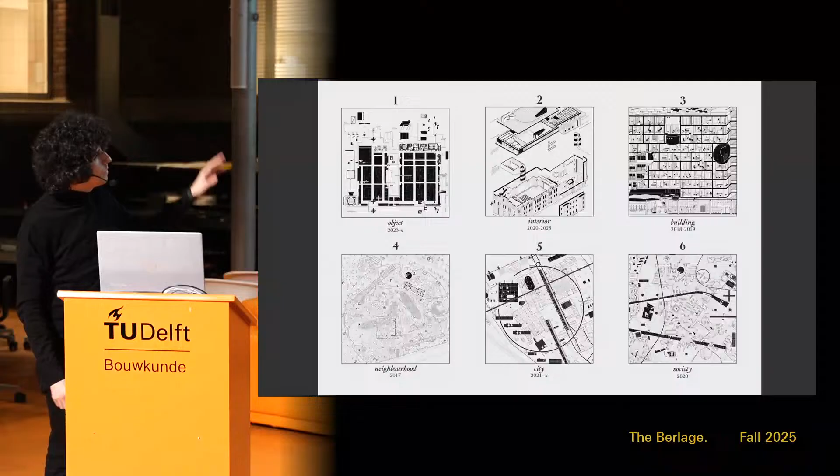As you can see, each of them has a different scale, from the scale of the object, going up into the scale of the interior, and scaling up to the scale of the building, the neighborhood, the city, and society. But before going into that, I would like to introduce very quickly three concepts that have informed my professional practice since the very beginning, sort of, in 2017.

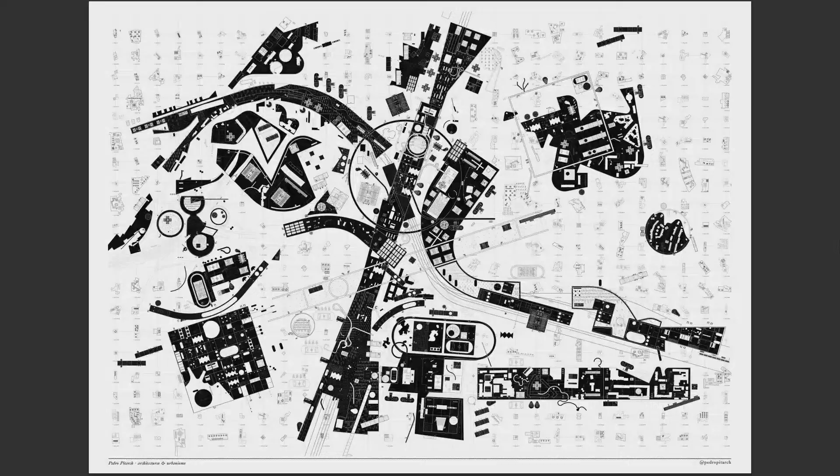But also this approach could allow us to incorporate into architecture many other layers of information that are not architectural per se, but that can be represented and graphed with this type of language, allowing us to incorporate economical information, cultural information, or even ecological information into the language.

The second concept is an approach to our projects in which we understand them as mediums and devices, dealing with an idea of the dissolution of programs. So in the projects I'm sharing with you today, we detach from this modern heritage in which form and program have a relation in the sense of typology, and we try to criticize that through examples where the assigned form to a program is not so relevant.

What is relevant for us are the architectural conditions and qualities that can be performed within it. Finally, the third concept constantly informing the practice, embedded into the DNA of what we do, is a condition of the erasure of differentiation, or the idea of the oxymoron, by which we address most projects critically engaging with apparent opposite terms, such as life and work, or machine and organism.

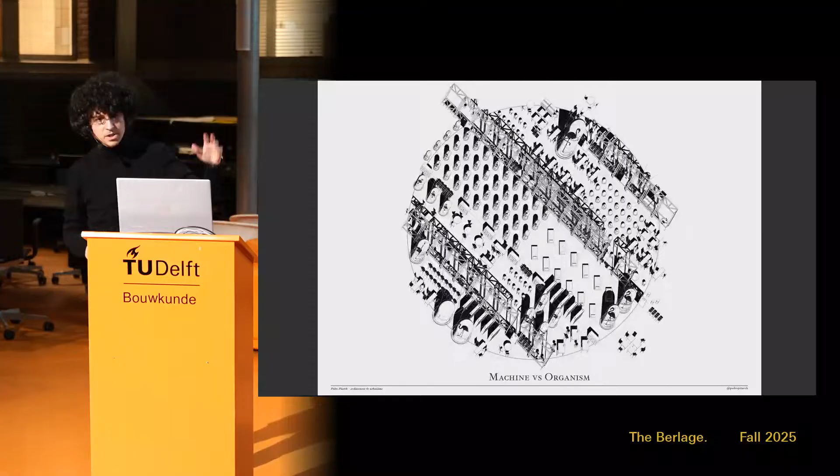We try to emphasize the idea that in contemporary society, these concepts, which by heritage of the modern project have been presented to us as complete opposites, are not so opposite — they are interwoven with each other. These three concepts have led us to a constant approach in the practice of a critique of typology.

Moving ahead into the projects, these 6 projects that I'm going to be presenting operate in 4 different scales. The first operates in the scale of the object, the following 2 in the scale of the building, the following 2 in the scale of the city, and the final one in the scale of a society. With this, we are trying to demonstrate 4 critiques to the concept of typology, or typological architecture, from the material, from the program, from the form, and from time, so that each of these scales, growing up in scale, is going to try to state a certain type of critique to the typology.

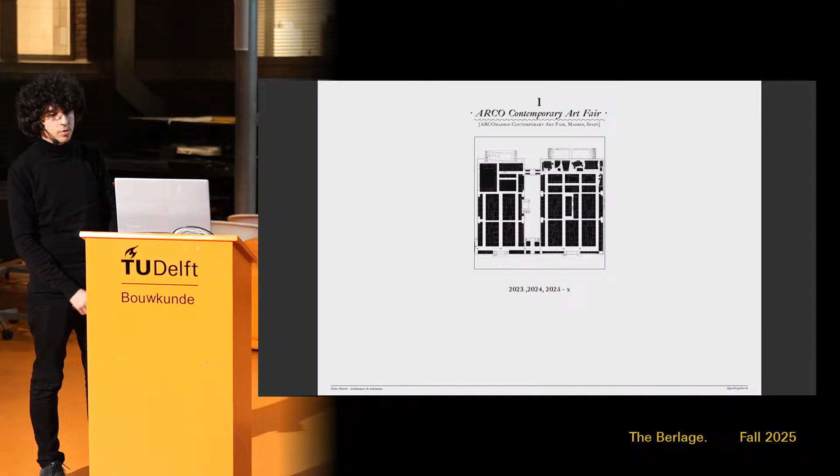So the first project I'm going to be presenting is a project that is somehow ongoing. We were commissioned, after winning a competition 3 years ago, to design Arco, the contemporary art fair of Madrid. It's something we are going to be continuing for a couple more editions.

Since the very beginning, we started by analyzing the conventional approach to the art fair, which belongs to this kind of layout. It's quite a shopping mall-oriented layout with a scheme that operates in corridors with big blocks.

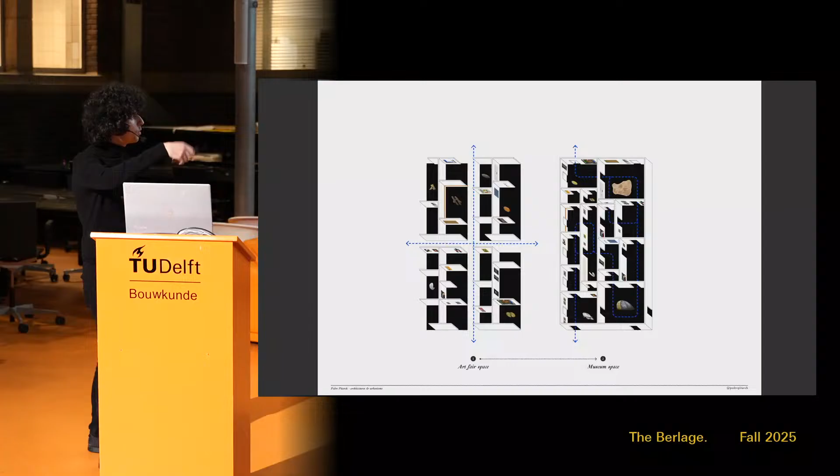We tried to propose from the very beginning of the project 2 migrations. The first migration was this idea of trying to shift from the fair space to the museum space, which deals not just with the pathways but with the notion of how you approach and relate to art. The second migration we proposed is a migration from the generic interior of the fair to an encapsulated urbanism of a city of galleries.

Understanding that these types of projects, regardless of happening in an interior, are so huge and have such a bigness of scale that they can perform as interior urbanisms.

For that idea, we started to work with the galleries themselves, with the physical galleries, with the plans of the galleries that show their art and that go and travel to Madrid to be present in this art fair.

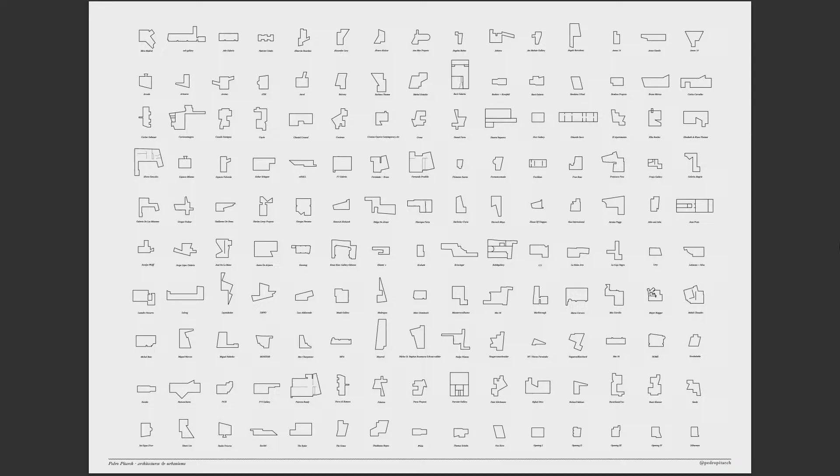We started to design a series of strategies by which those plans could be simplified and constructed with the generic materials of the fair. We later progressed this into applying the technique to all the plans of the galleries, so that we could argue that the plan of this city of galleries of Arco, this encapsulated urbanism, could become a gathering or interior city in which each gallery was exhibiting in an exact one-to-one mock-up or replica of their own architecture, with a common, totally generic materialization: the white wall board of the fair.

We have been applying this technique and approach to the fair, understanding that this approach to the layout could offer us the possibility to understand that these interiors are domesticated urbanisms, by which they are somehow in between the qualities of an exterior space and an interior space, and also of a public space and a private space.

But what is more important for us in this project is not so much the scale of the encapsulated urbanism, but much more the idea of object-oriented urbanism that we have been working with in the project.

So we have been deliberately working with fair materials that are somehow quite ugly, such as this kind of fair carpet, which is the cheapest, super ugly material in art fairs, trying to emphasize and visualize that material with non-conventional uses, for example applying it to the walls, and also the lighting trusses, using them in another way so they can become part of the language of the fair itself.

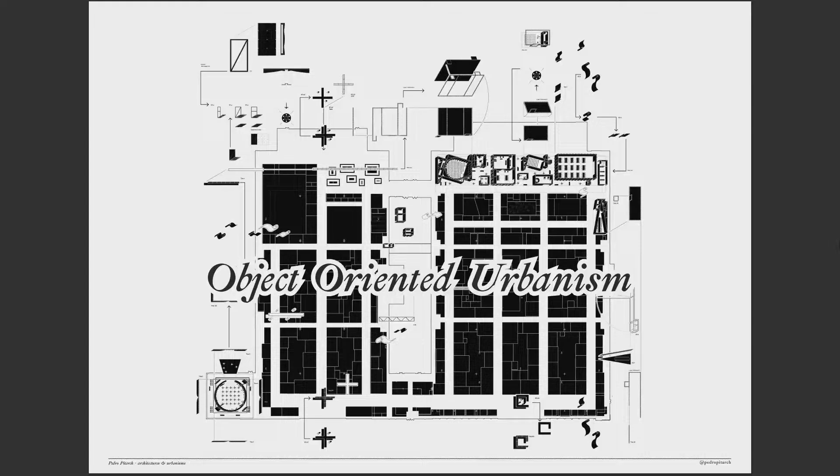And so the whole project has been pivoting around this idea of object-oriented urbanism that tries to visualize all the different construction techniques and materials of this fair's synthetic organism, trying to position ourselves just a little bit apart from architectural design, and trying to address that our position there is much more of an infrastructural curation.

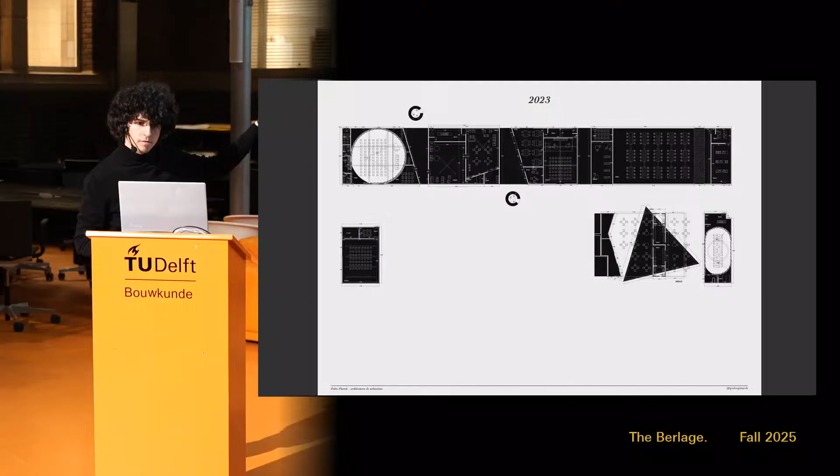I'm going to share with you the plan of one fragment of the fair, specifically the public programs, and how it has evolved from 3 years ago to 1 or 2 years ago and the last edition. For us, it's not so important the formal differentiation of these plans, but actually how the materials, construction techniques, systems, and working methods with the builders have been informing the form.

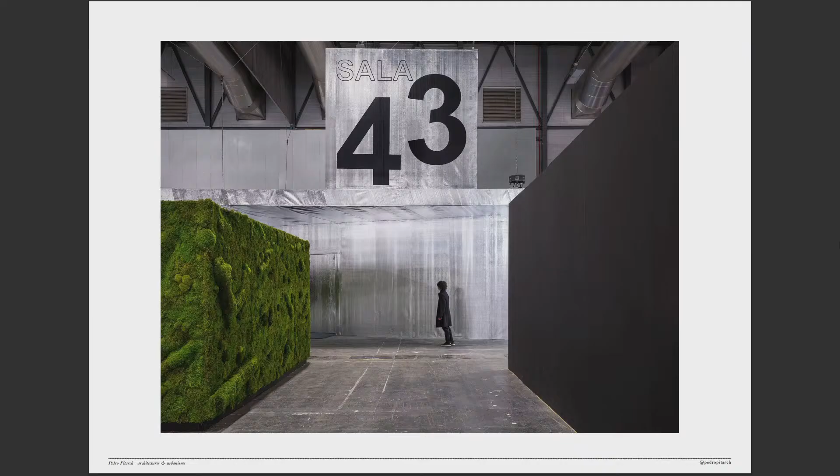The form has not been driven so much by the program, but much more by the materialization using aluminum insulation materials for facilities, or carpet for acoustic insulation in some pavilions, or geotextiles for creating the background of the fair. Together these materials start to construct this fair ecosystem, an artificial ecology that isn't understood conventionally, but where the fair itself is an ecosystem in which these materials and construction techniques inform the project.

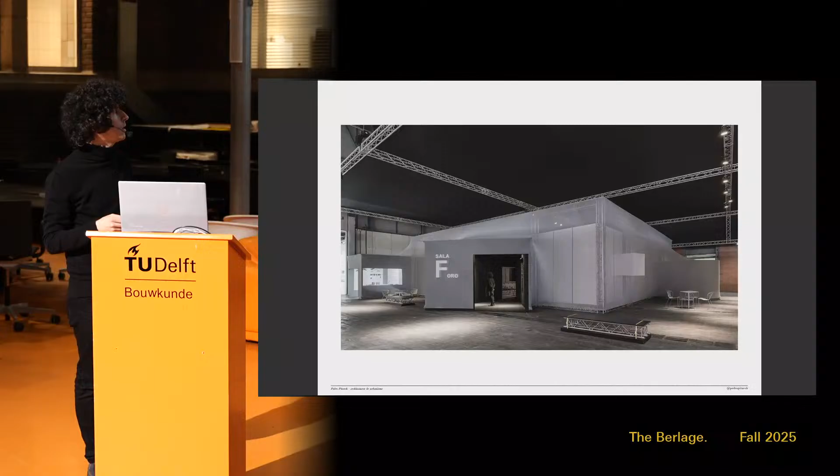But the same project was developed in the following edition with a completely different form, which resulted from the type of material we were applying. We were wrapping the whole piece, so the composition of the plan wasn't important, but rather the material that wrapped it — a net usually used to break reverb sound in stadiums, which we used to generate an acoustic insulation skin for the activity happening inside.

As I was saying, it's not just materials but techniques of assembly that have been defining the shapes and materialization of the projects. In this case, we were not just applying them for the qualification of the spaces, but also in terms of longer logics of the fair.

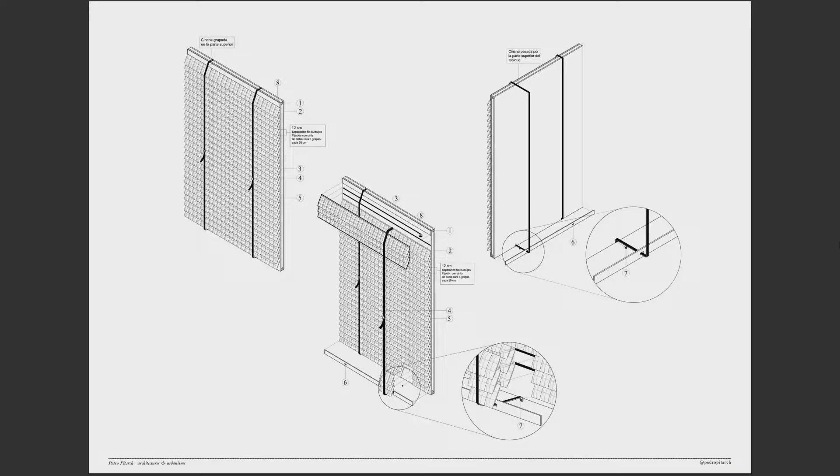On the right we can see we were applying this material — I don't know how you call it — like the bubbles you blow when you order something from Amazon, sometimes packed inside. We used these materials to wrap around a whole piece, and at the end of the fair, galleries would remove them to wrap the art pieces that were sold for shipping. So we were thinking of a bigger, wider logic of this fair ecosystem, where material is not wasted but injected into another process.

The same applies to the trusses — these rented trusses we used to invent a type of furniture applied in many ways throughout the fair, also designing with it the space of the food court for the fair.

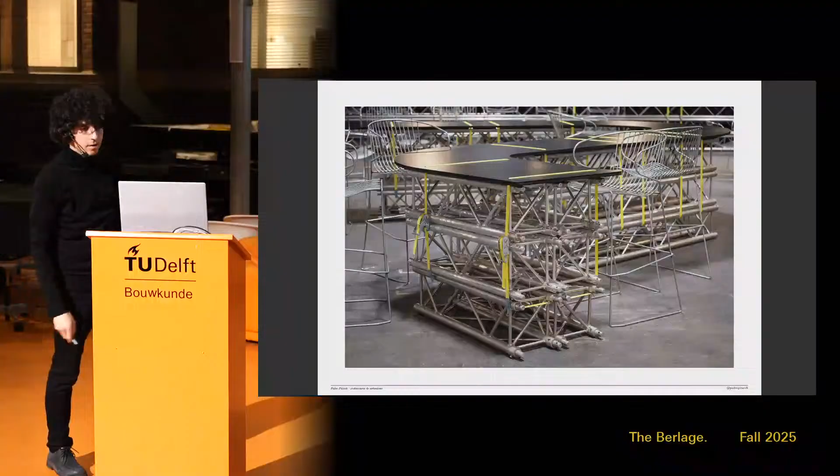Stepping up in scale, the following project is one we've been developing for the past 5 years, in a very intermittent way due to political concerns. It was part of a competition we won in 2020 for the restoration of a cinema in the south of Spain, part of a complex of two buildings. The one on the left is from the late 19th century, originally a market later transformed into a cinema. The building on the right was designed by the same architect with a modern movement approach, and it was a dwelling.

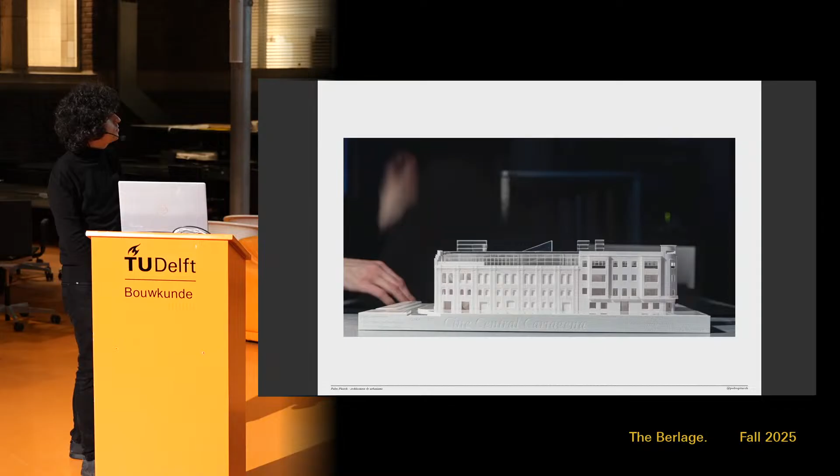So basically, they had two types of heritage preservation requirements. The cinema we needed to keep as it was inside and also on the outside, but the dwelling building could be demolished inside, but we needed to preserve the facade.

So the project, in a wider scale, offers us the possibility to address a wider necessity of the city of having a big civic space. So we operate with the pre-existence, emptying the interior of the dwelling building, but restoring the other.

And the whole project was developed around a piece that we were positioning from above, a big truss, from which a cube was hanging and inhabiting the interior of the space of the former dwelling building.

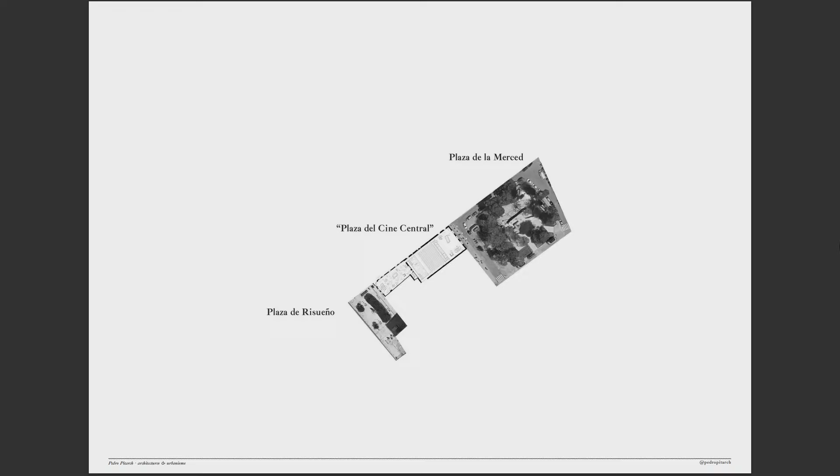As I was mentioning before, in an urban approach, the building offered this possibility of connecting two squares that are very important for the city but somehow not so big. By trying to make the ground floor of the project completely public, in a kind of a Nolli approach, we understood that these elements could become three courtyards, three plazas, or three squares.

So this was somehow the idea. If we were doing a section of the building, we were preserving the whole space of the main theater or cinema theater, and then just by adding this kind of roof structure, we were also adding more square meters. So instead of the competitors of the competition, who were putting everything in the second building...

We could generate this lower plan that was much more public and empty in a sense, and giving much more program by the thickness and the height of the upper structure of the roof.

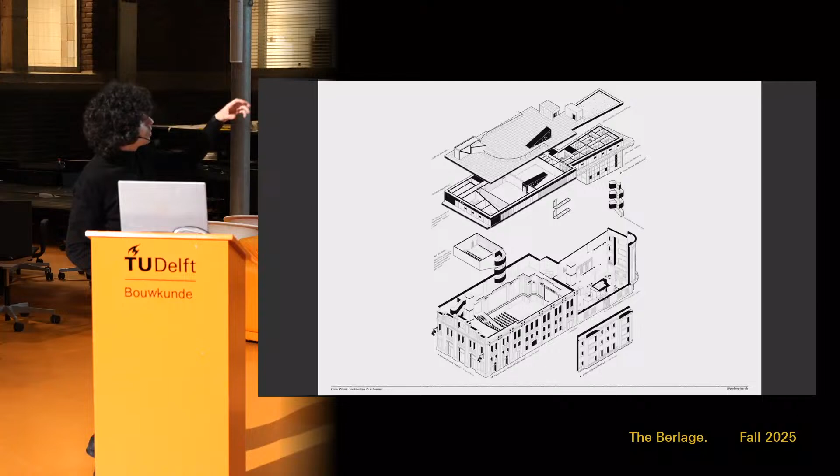So somehow the scheme is this one. The scheme is organized around a kind of skin, a historical skin, and then just positioning on top of it a space that was adding spaces for musicians and spaces for this kind of cultural center that is hanging from above. So in that sense, the programmatic approach to it is very simple.

It has one main room and then certain public spaces and service spaces. But for us, the organization of the project was not so much driven by the program, but driven by the structure itself. The city where it is positioned, Cartagena, is a city that has a lot of Roman...

ruins, and we had to do a series of tests, and we found out that the foundations for the new element that we were adding on top - because the facade didn't have enough capacity to hold the truss...

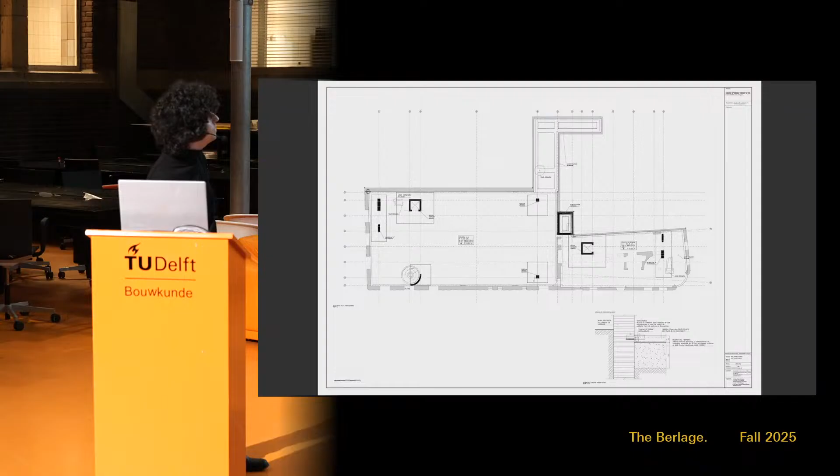The only foundations that we could do were these ones. So the structural support of the whole building needed to be positioned very weirdly, with a strange approach, by which we started to coordinate circulation elements, vertical circulation cores, on 8 points, and those 8 points are the points that somehow also define the structure of the truss above.

And that decision of defining the layout of the plan from the possibility of foundation and the relation with the truss is the one that drives the whole composition of the plan.

As I was saying before, the low level is a level which is extremely public and that allows, whenever there is no performing event, to open everything to the public. And then the upper levels, on one side, are very different.

On one side, we have the hugeness and vast space of the main hall, but on the other side, we have this little cube that coordinates different types of multipurpose rooms, with an in-between space from the outside and the inside, between this kind of second facade that we are doing inside.

And then finally, the last level is this level inside the truss, inside the structure, which gives us extra square meters - basically a lot of spaces for playing music and also for offices and so on. Also, this idea of the horizontal element on top was offering us the possibility to do events on the roof.

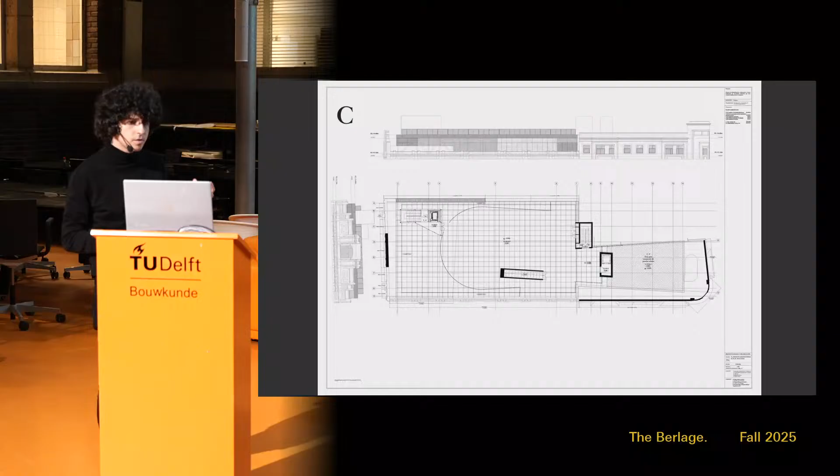So these vertical cores that I was explaining before, they reach the rooftop and also offer the possibility of appropriation of the rooftop.

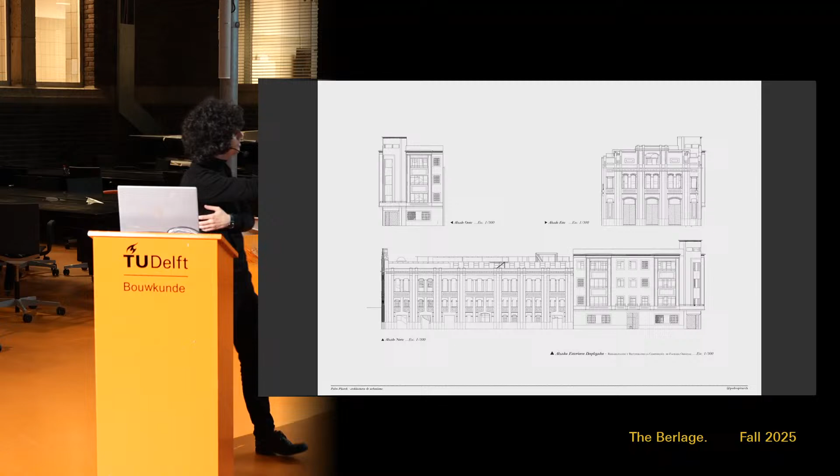And also for exhibitions. Then the final element that was extremely important in the project was this idea of preservation of the main facade. We tried to go farther there, and we didn't want to preserve just the exterior elevation of it, but we also wanted to define a series of strategies for preservation of the inner elevation of the facade, so that we could somehow materialize the whole story of the dwellings there.

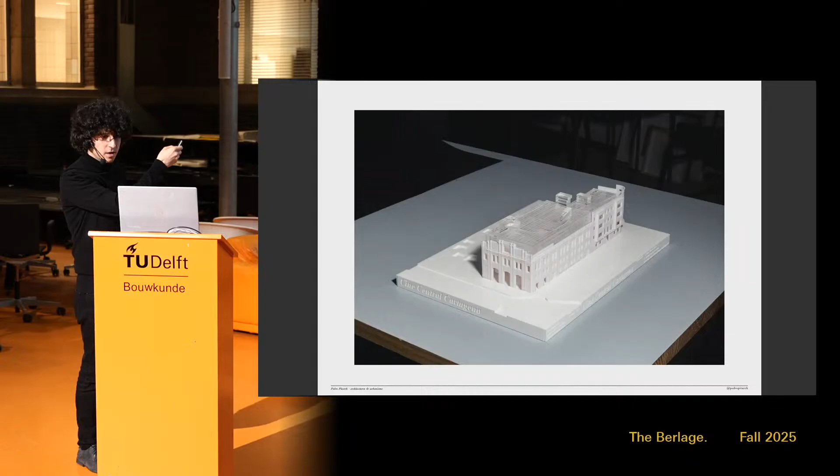So by detaching the new piece from the main facade, we were making visible all this interior, all these domestic interiors that we are keeping in the final project. This strategy of adding this element, from a construction point of view, also gave two problems to solve: one was the relation with the main facade of the cinema, and the other was the relation with the secondary building, which are completely different.

With the main building, the facade still has some kind of structural capacity, so the relation is like this. We are separating ourselves, but somehow we have to climatize underneath, and the relation between the truss and the facade is that they collaborate with each other.

But in the building of the dwellings it's a much more complex situation, because the main facade cannot support any capacity. So what we are doing here is a quite complex system in which we are rigidizing the facade because it's standing by itself, and then adding some elements that transmit horizontal efforts, but then the whole piece can move together up and down because they are articulated. So this whole element is coordinating the different structural efforts and the different foundation capacities: of the wall, which is not going to move so much, of the facade, and of the inner piece, which is expected to move down in the future and therefore needs to be articulated.

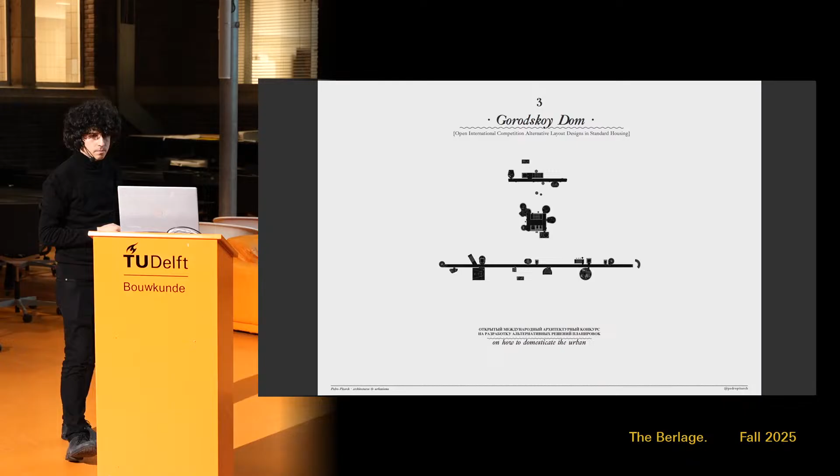Going a little bit more in scale, the third project I'm sharing relates to dwelling and housing. It's the result, again, of a competition where we got second prize many years ago for the government of Russia, who were seeking standard layouts for social housing and collective housing.

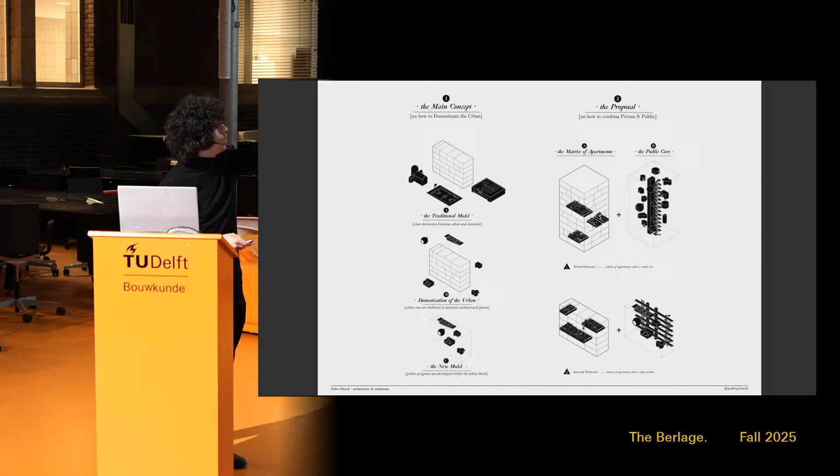So here we started the project with a very strategic approach. We analyzed that in the traditional concept of the conventional city, dwelling and public programs are completely detached from each other, so that public programs are usually placed either in urban spaces or in civic buildings. So we tried to explode that and inject those domesticated pieces of public use into the block of the residential building, generating two models in which the whole space was a layout resulting from adding a whole mass of apartments to a series of public capsules coordinated by vertical cores.

We applied this into three layouts, or three types. The first is the gallery, which is obviously a very continuous space in which the corridor was coordinating the relation between this vertical and horizontal public space of the corridor, together with the vertical cores and the access to these public capsules which held urban spaces, and all this horizontal element was also coordinated by the vertical cores in order to touch the ground floor, allowing the permeability of citizens to these other types of pieces.

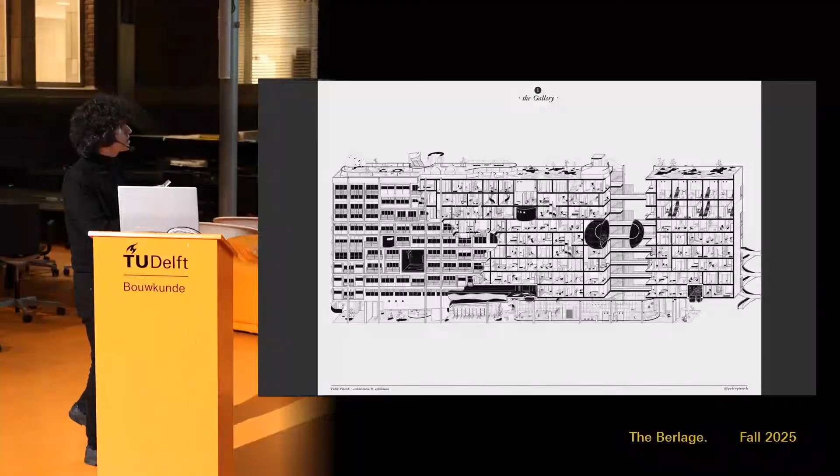So the result was this: a complex building that, behind a very deliberately generic type of facade, was offering a series of combinations, an interior city of different types of apartments for different types of users, where every now and then we were removing either an apartment or part of an apartment in order to inject one of these public capsules accessible from the corridor behind. And the result was something like that.

No, this is something that we were trying to generate—that back elevation of the project as something extremely public and extremely permeable. And somehow the same technique and the same strategy was applied to the other two types.

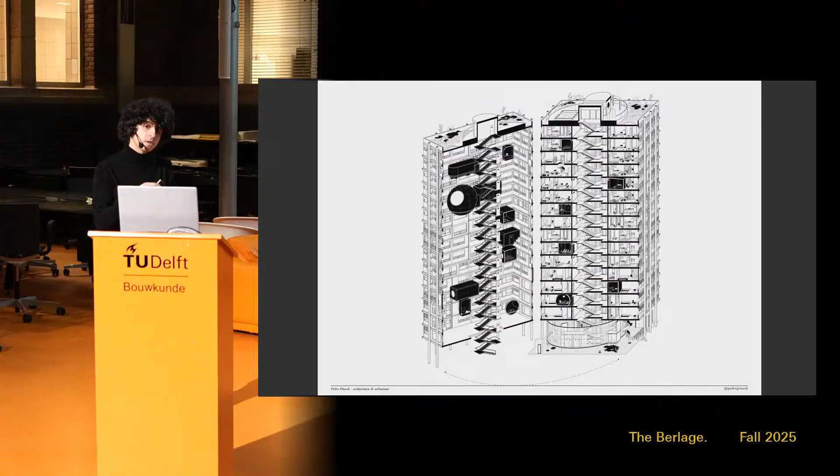One of the tower types, in which the whole sequence of public spaces were organized around the main central core. This allowed us to propose a scheme in which, behind a very generic type of facade, we were organizing a huge diversity of apartments, all accessible by a central core.

A central spine, a vertical spine that was also giving access to the public spaces. Finally, the third type was a mix between both of them—the block section, in which we had features from both the gallery, the lineal element coordinating the vertical cores, but also this central condition of the tower, materialized in a different form and a different layout.

The strategy behind it was also revealing this generic facade with a series of internal capsules, offering the possibilities of combination of different types of apartments. So the apartments were actually a whole big range of apartments.

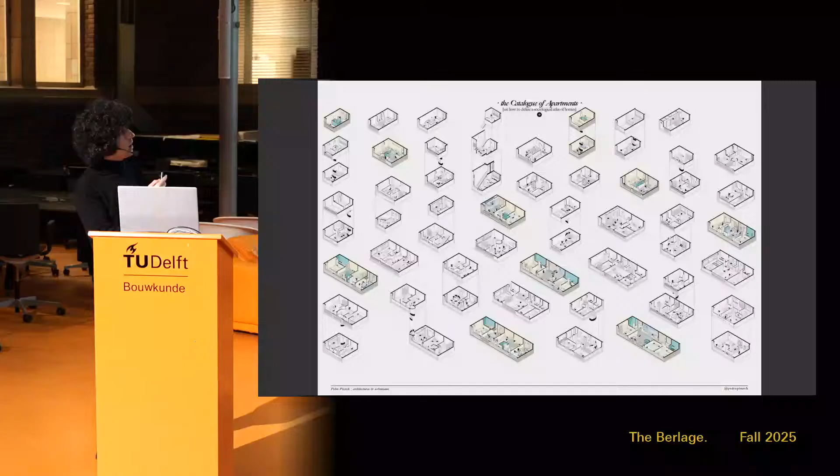We were requested to design the colored ones, but we offered different variations in relation to a series of sociological approaches that we did, so that we didn't approach the apartment so much from the specific square meter requirements per program, but designed different variations according to different social types and different combinations of families, or different critiques of the family core.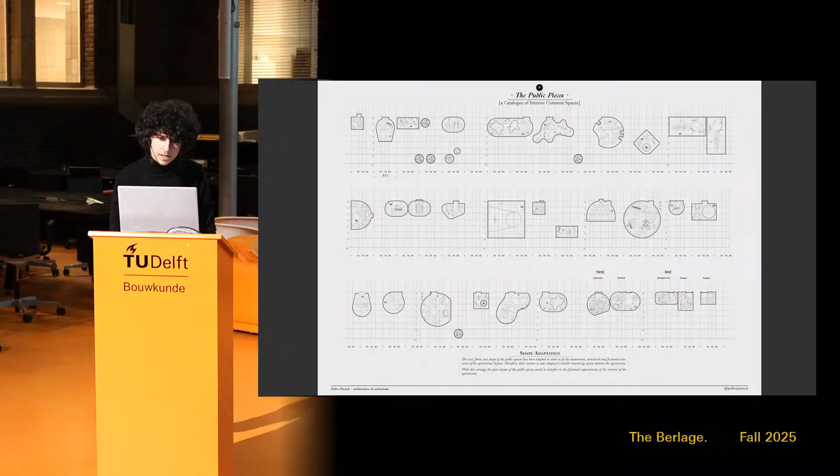Again, we had to do a catalog of the public spaces, which was extremely important to do in a very pragmatic and precise way, because regardless of their strange-looking shapes, they needed to be designed according to a series of patterns and modules, so that they could be either injected into the structure of the layout, or injected into the removal strategies of certain pieces from the apartments.

And the result behind this apparent complexity was this system, in which, through the materialization and the approach—this was the first project in which we started to do rendering—we wanted to emphasize a very neutral materialization behind a complex system, so that the complexity of the system and the strategy didn't require a complexity in materials.

Moving up on a scale, this following project is for the New Cyprus Museum. It was the result of an international competition in which, again, we got second prize, not first prize. This competition was extremely important because it's the first one that established the practice as something more serious, or business oriented.

Until then, I was doing competitions, I was doing projects, but this is the first serious project with a whole team. The project started with a brief from the jury, which was the definition of an archaeological museum for all of Cyprus in the city of Nicosia.

So answering that question, we ended up with this project, which is apparently very complex in form, but it's not so much addressed from form itself, rather from a strategy that tries to establish a critique of the typology of the museum as a neutral space for generic configurations for specific art pieces. This layout responds to a radical statement in which we divided the project into 3 layers.

First of all, we had a layer which was the public floor, an extremely open public space, which we stated from the very beginning was going to be all museum space, going to be on the ground floor, and going to be accessible.

Then a second layer, which were the closed pieces—both public and private specific pieces, with different ranges of formal approaches, but which somehow gather very specific programs that needed to be hermetic and secluded.

And finally, all of it was covered by an infrastructural roof that had a very generic form, almost a circle, which was an abstract gesture in order to gather the complexity below it.

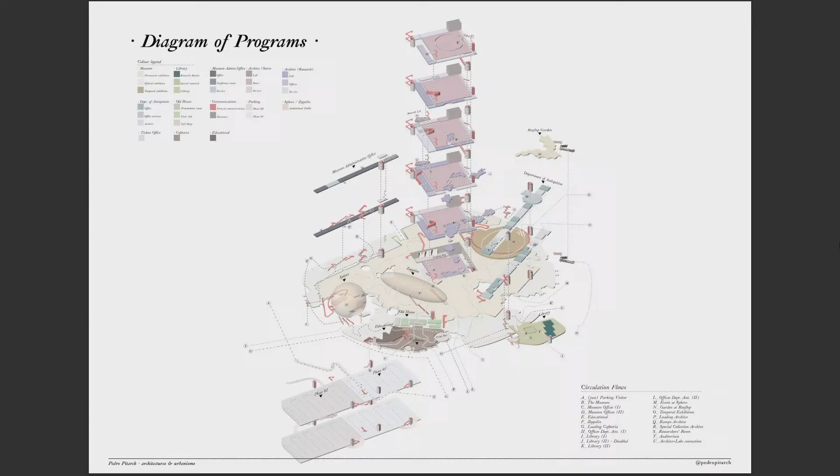The project was an extremely big project with a lot of complexity in programmatic approach and circulations that we needed to solve. But the approach was maybe not so much from the whole picture itself, but from the program, from a further picture, from a much more metropolitan approach.

So in this sense, we didn't start working with the space of the museum nor the spaces of the pieces, but we started working with the landscape and the connections to the city, and the urban approach of this museum, and how it could become a space for the city.

And in that sense, we started doing a series of this kind of atlas of urban infrastructures, a landscape of islands, which were urban elements included in the landscape around, and that could offer functions, or not so much function, but spaces and scenarios, scenographies for certain activities.

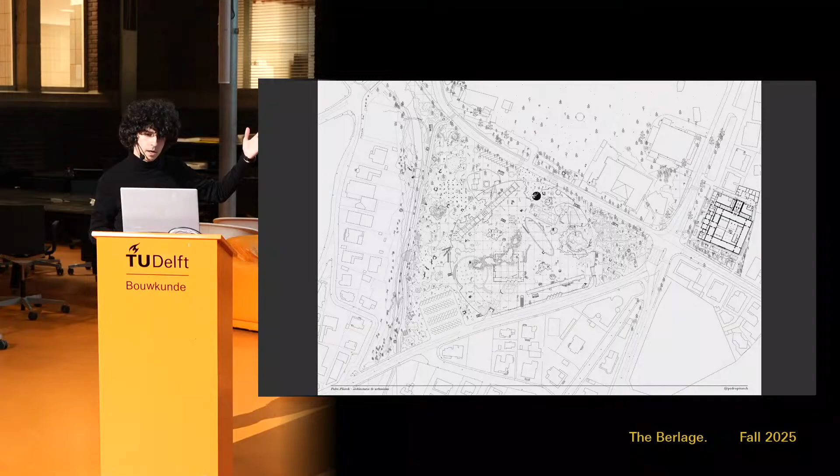This design was driven by the urban approach, so that the interior of the building and the museum was not decided as a different type of strategy. The site plan and the architectural plan, the architectural plan is just a zoom-in with more resolution of the site plan, giving more resolution at a smaller scale for the architectural requirements of the interior, but the DNA and genetics of that interior museographic space is a consequence of the exterior landscape.

So if we remove the facade of the building, we don't see a clear distinction between the exterior space and the urban space and the interior space of the museum, and that facade is a consequence of two very basic requirements. One is an environmental requirement, that the pieces needed insulation from the environment and climatic control conditions. And the second is economy, because they needed to charge a ticket for the visitor.

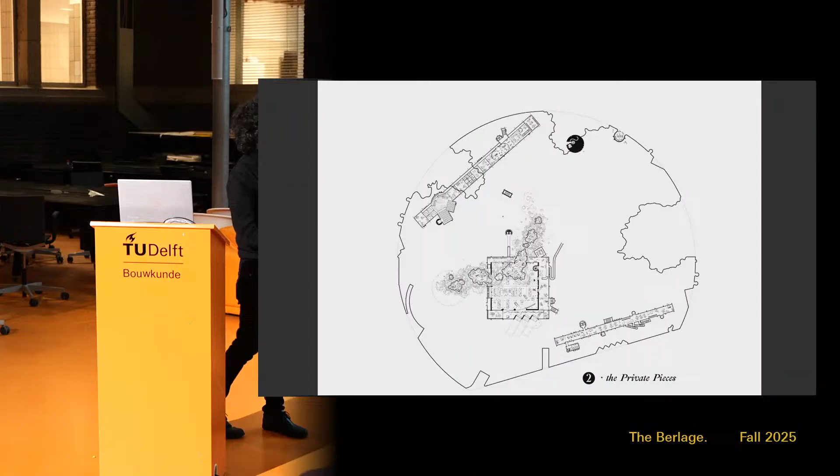Going into this, as I mentioned before, the whole space of the museographic space was the result of a series of strategies by which we were designing, first, a series of public pieces that each have a very specific form because they belong to the requirements of that function, and a series of private pieces.

After putting both of them inside the area of the project, the museum space was not so much designed, but was a consequence of the collision between the externality of the exterior urban space and all these buildings within buildings that we were positioning there. So the whole space, as sometimes in our cities when we are adding architectures, the urban space is like a poche in between, something that is not so much designed and decided, but is a shape that is found.

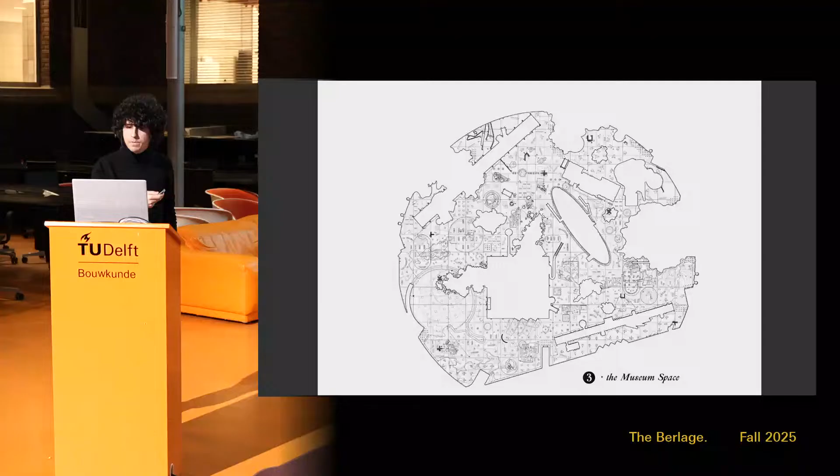So in this sense, we tried to take that, and we were probably, like most of the teams in the competition, who were obviously starting to design the museum and then the secondary spaces -- we did completely the opposite. We designed the secondary spaces and then the museum spaces, and therefore we didn't win the competition.

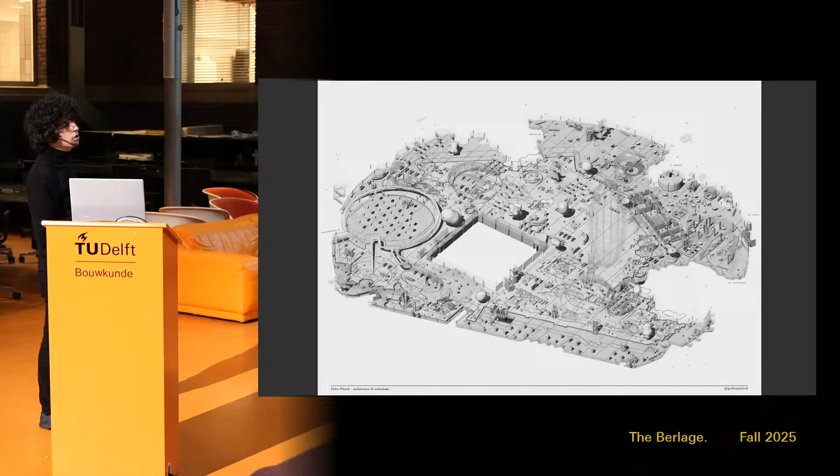But we could understand that this whole archaeological museum was a part of the city, and that the compartmentation was not coordinating the different areas, but the different areas were coordinated by devices, such as furniture, but also by landscape accidents. And that offered one of the possibilities, which was going from one section to the other in a kind of chronological approach.

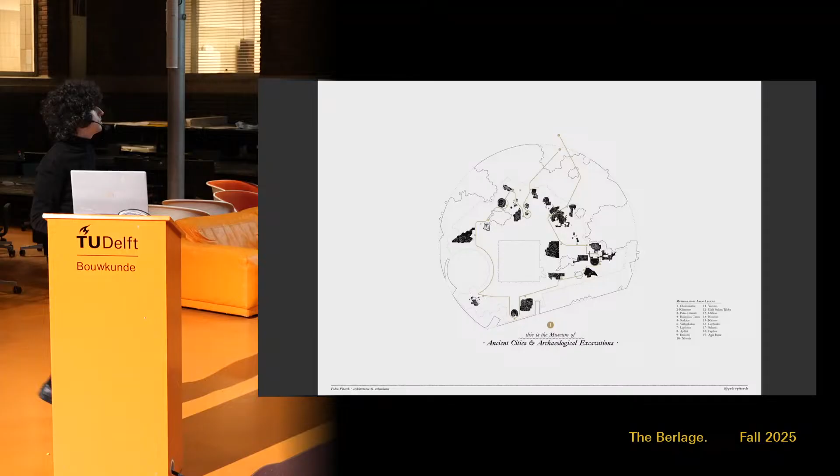Going from the early Bronze Age, Middle Bronze Age, and so on, but also offering us a strategy to define a series of museums within the museum. We provided in the competition about 8 configurations, but here I'm showing a couple of them, so that we could somehow go through the museum as if it was a city, as if when we visit a city for the first time—you go to the main square, then to the Oude Kerk, then to TU Delft and so on—but you don't travel around the whole city, you go to certain points. So we could...

design a museum which was the Museum for the Ancient Cities and Archaeological Excavations, but with the same layout also offer a museum of social governance and politics, or a museum of archaeological highlights for the very lazy tourists that only want to see the highlights.

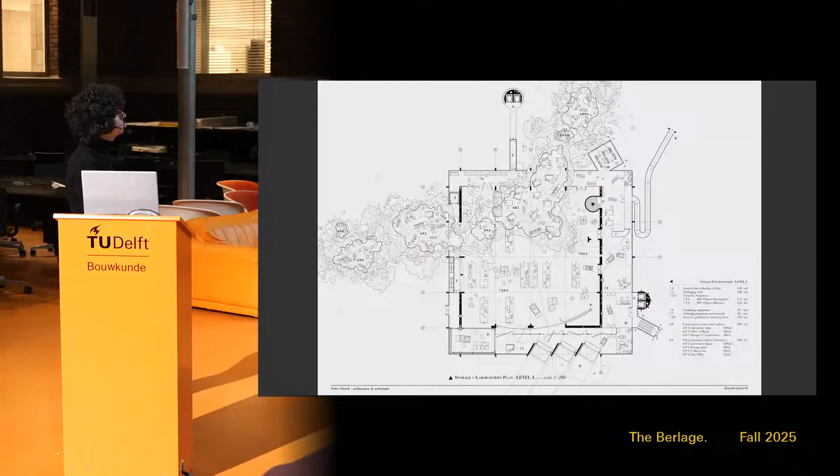And then the rest of the project was designed through the definition of the private pieces. I'm not going to go so much in depth here, but just to give you a glimpse, each of the pieces had a different approach. For example, one of them held the whole archive and also the laboratory. So here we were offering two types of structure, one for the inner cage and another type of structure for the secondary loop around it.

It was a structure inspired by, or deliberately almost copied from, an early OMA project from Karlsruhe—these kinds of trusses, one on top of each other, that liberate some floors and have an inner structure. For each of the different pieces, we offered different schemes.

So that we were also emphasizing this idea of the museum, the city within the museum, or the city within the building—that each element of the project was conceived as a building itself, and the whole building was not just conceived as a building, but as the result of a kind of small neighborhood, a kind of small city. And then the same for the public spaces.

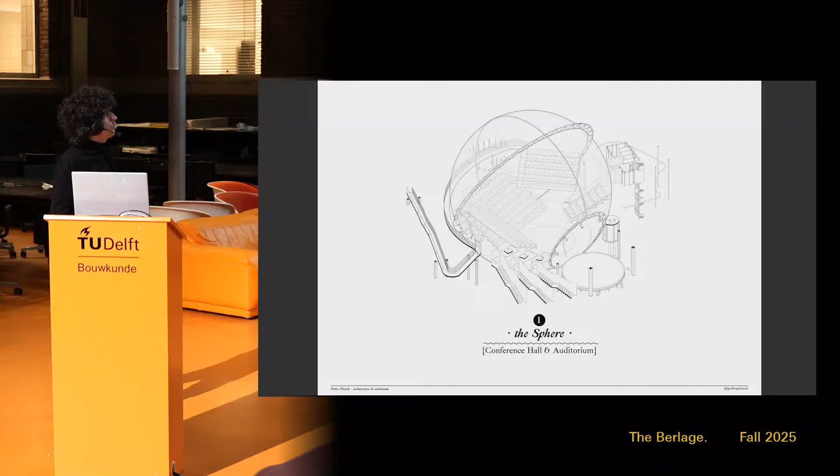A sphere, which was a conference hall, the library—a specialized library for researchers—also some educational areas, a gift shop, which was the only non-new piece, a kind of restoration of a former element. And then something we called the Zeppelin, which was a structure for virtual reality experiences that the museum was eager to have at that time.

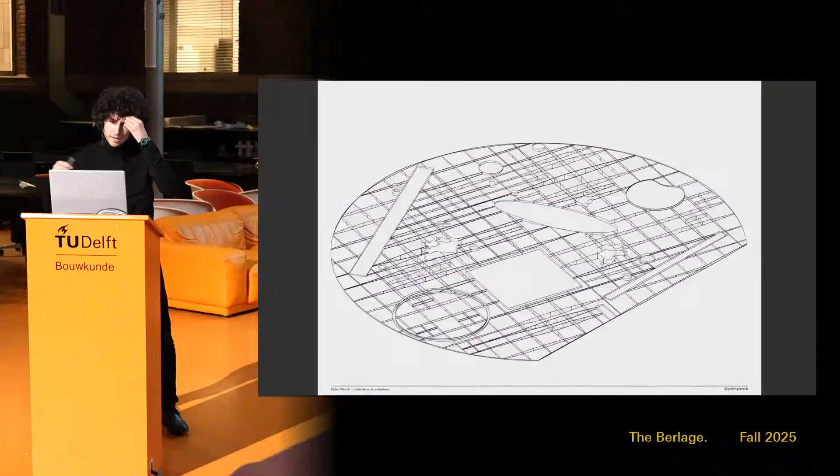And finally, just to quickly mention the third layer—as you remember, the project was defined by that open ground floor of the museum, the rest of the pieces, and then the infrastructural roof.

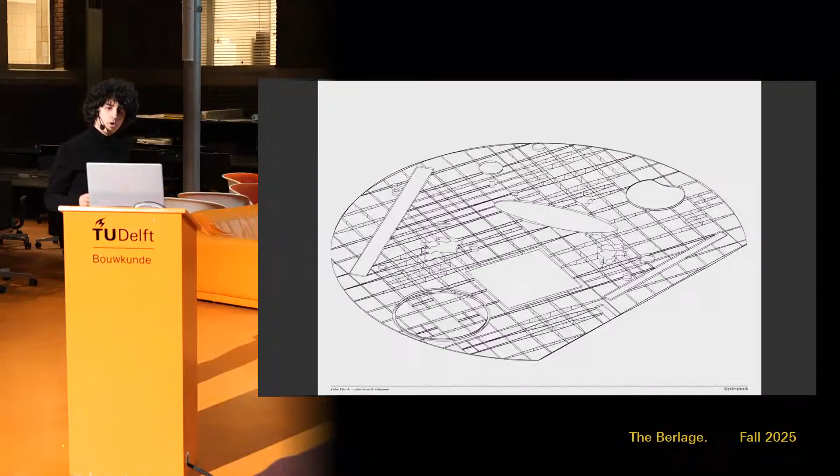The infrastructural roof somehow had, again, a form that was not so much designed but was found, in the sense that the trusses and structures that define the grid of the roof are not parallel, so they get thicker or thinner, and that thickness and thinness responds to the diagram of forces and capacities needed. So we make a thicker truss where we need more structure, and a thinner truss where we require less structure.

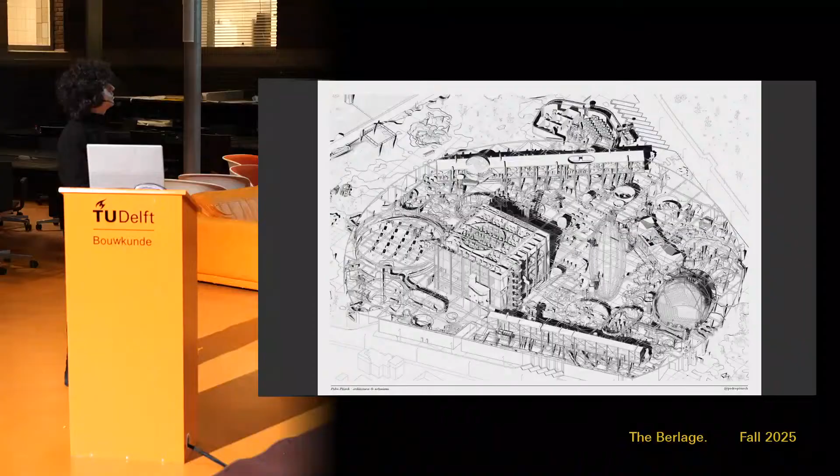So the result of the project, that complexity I was addressing at the very beginning, was not so much something designed as a target or as the name of the project, but something found by the addition of a whole series of small complexities. So here we can see how they all relate to each other—the ground, the open floor, all the different pieces, and the infrastructural roof—and the relation between interior and exterior that we were trying to address with the model.

Going to the final two projects, they jump into a wider and bigger scale. This project is one we won in a competition, Europan, in 2021—Europan 16, two editions ago—in Aalst, a city in the outskirts, going from Brussels to Ghent. It's a project we started that has somehow been ongoing. With this project we were emphasizing the idea that it already had the scale of a huge urban site, but we were trying to address it as a kind of urban prototype that could extend its influence to other elements of the city.

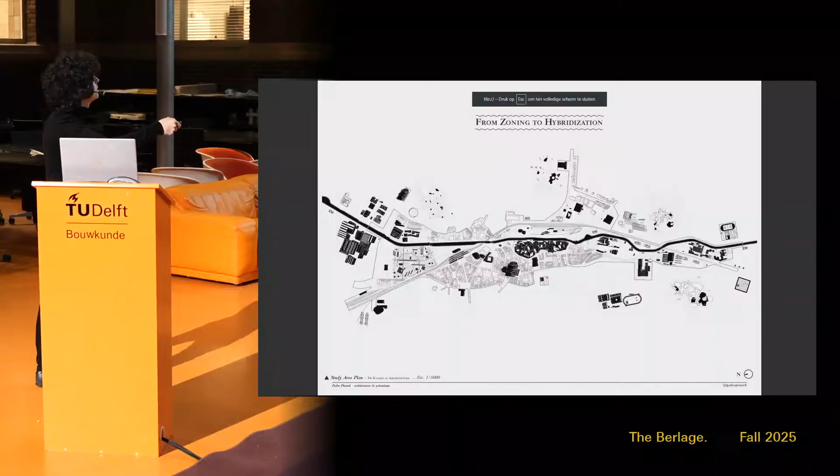So this project is located here, positioned in between two infrastructures: a natural infrastructure, which is this river, and an artificial infrastructure, which is the train tracks.

We saw the opportunity that those two infrastructures could coordinate some of the influence of the project into other sites, not just of the city, but at three scales. From an infrastructural scale, the project could become a logistic trigger, positioning itself as a node of a further network of other sites with the same approach or development, that could be feeding each other.

From an environmental scale, we understood that the Dender River could become an architectural device that helps the project have a wider scale, becoming an ecological distributor of a series of regeneration natural strategies that I'll introduce later on.

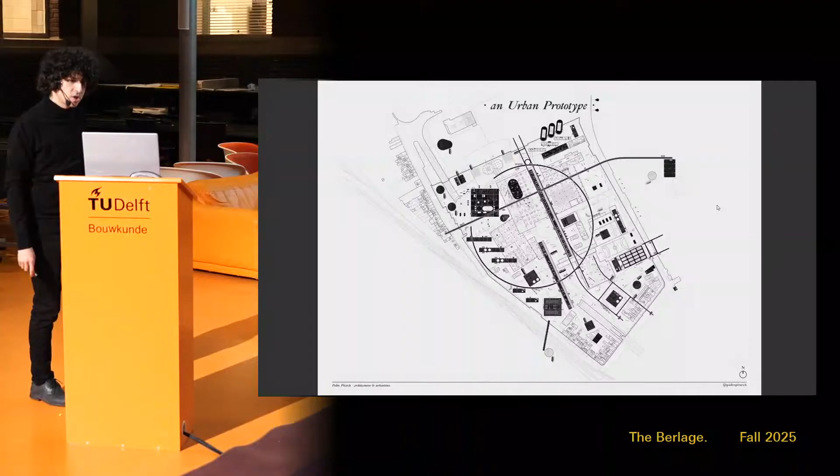And from a social scale, a more local scale, the project could become a programmatic activator, offering place and space for activities from other spaces we've been researching that didn't have enough space. This is the plan of the project, which could become an urban prototype for the whole municipality of Aalst.

Our approach tried to criticize our attitude towards urban design. Instead of building a context, we were proposing to curate a context.

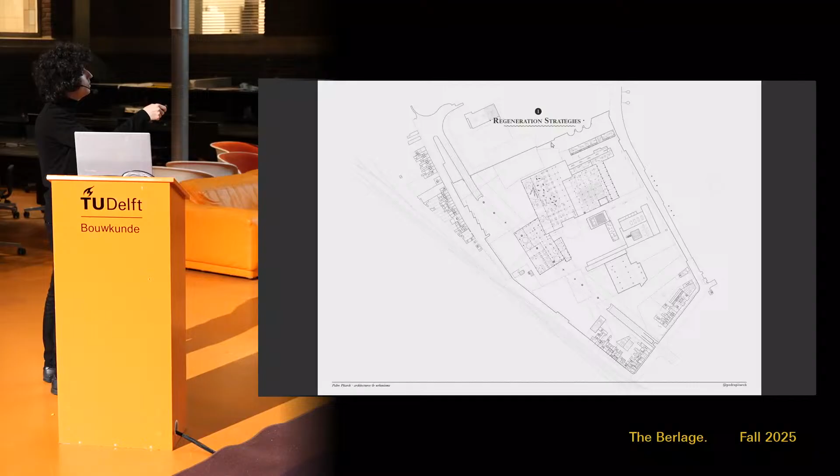To do that, we started a series of strategies coordinated over time, operating with the existing urban frame. First, a series of regeneration strategies mainly confined within the boundaries of the heritage buildings that needed to be preserved in the center of the plot.

These are former factories. Afterwards, once those regeneration strategies were accomplished, the successful programs tested there would define architectural artifacts on the periphery of the project, and later inform the materialization of connection elements, and finally a series of activation devices.

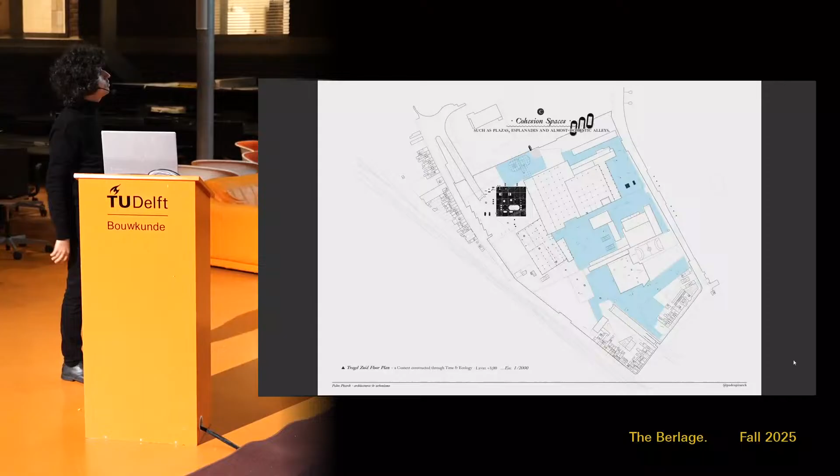Throughout this process, we tried to define and qualify a series of cohesive urban spaces in between, so that the apparent formal complexity of the master plan is just the addition and superposition of a series of simpler layers.

For us there's another layer that's not so architectural but ecological, where we've worked with regeneration strategies using a catalog of vegetation endemic to the area, treating these ecologies as architectural devices.

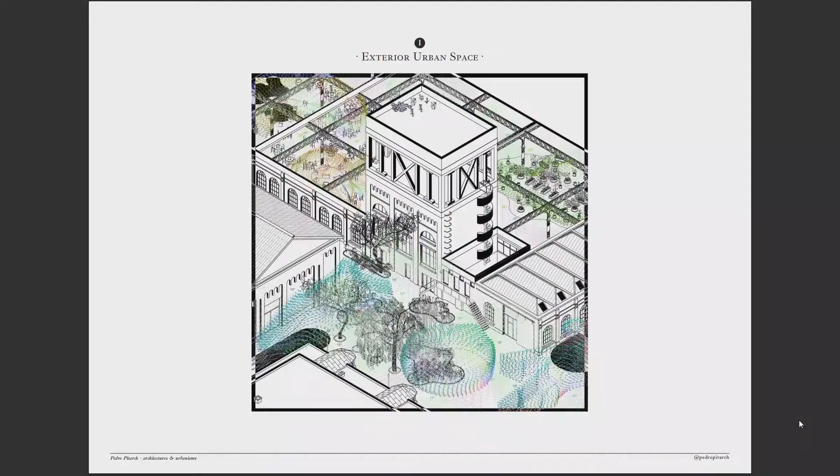By introducing this vegetation, not just in the public open spaces but also in semi-interior spaces, we could generate a gradient of ambience and atmosphere that would define a different type of zoning.

A zoning not relying on conventional architectural elements like walls, ceilings and boxes, but instead doing compartmentation—not with walls, but with vegetation.

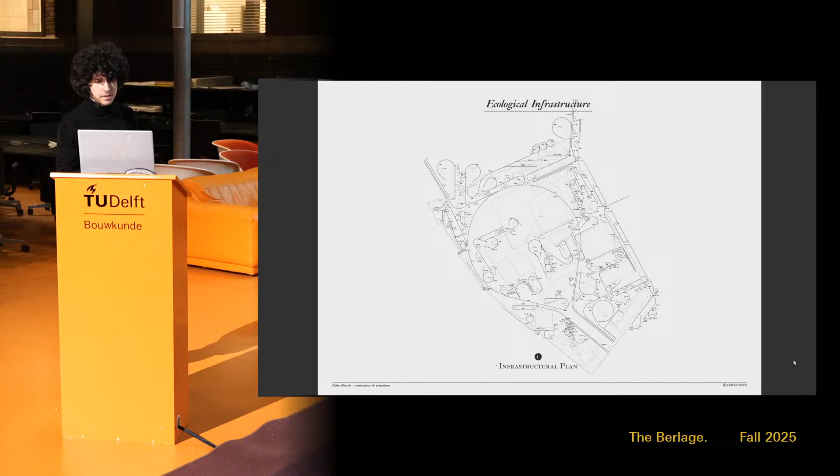That approach needed an ecological infrastructure to overlay the architectural infrastructure. This is an extremely boring but very beautiful document: the plan of all the pumping, pipes and water vapors providing water to the different plants that will be planted outside, as well as watering the soil.

This has a consequence, which is the irrigation plan. That ecological infrastructure and water infrastructure is forming and transforming the soil and the lower elements.

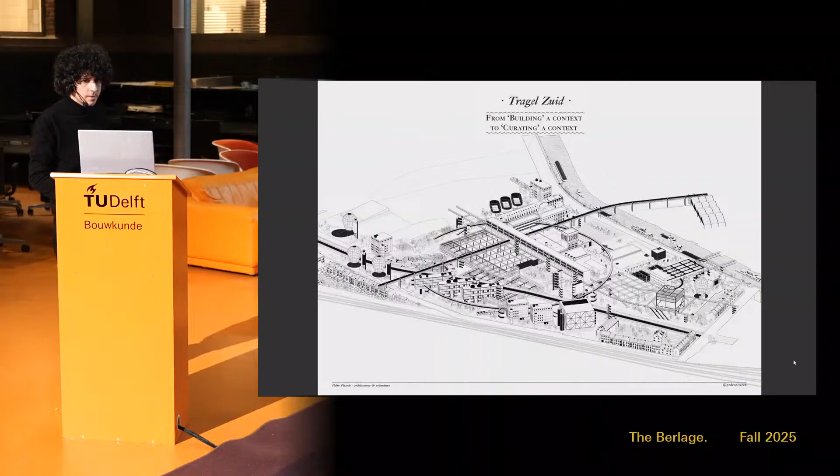So in that sense, for us, with this approach of a migration from building a context to curating a context, the final result of the project is not so relevant for us. The final form is not so relevant, but what is relevant is the timeline. We could state that this is the main plan of the project, which is not so much developed in a cartographic way.

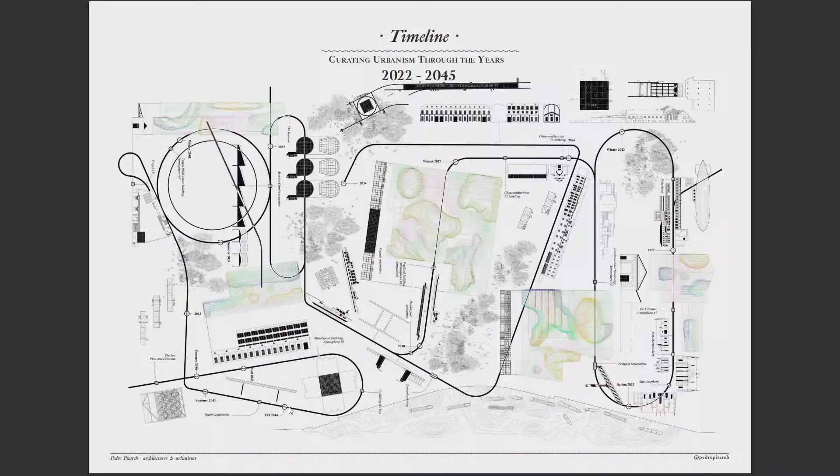So that everything is positioned in its geographical position, but somehow it's much more topological. We were extremely naive, and we won the competition in 2021, and we thought we were going to be starting in 2022, and we haven't started anything at all at this moment. The whole idea is that the project is established throughout this timeline in which a series of strategies, both architectural regeneration strategies and ecologies, are coordinated in order to arrive at the final image of the project, which is this one.

And then finally, the last project I'm sharing today is growing in scale, and it's a project we did again for a competition, 2020 almost, during 2 years, for Germany, for the Berlin municipality, actually for a holding between the Berlin municipality and Berlin-Brandenburg state.

And with this project, we took the chance of using the project—we're going to explain it a little bit further now. The project was, they were aiming to define a model of growth for the city of Berlin for the following 50 years. So the competition was held in 2020, and they wanted to have a strategy on how Berlin-Brandenburg could grow in the following 50 years until 2070.

So for such a purpose, we took the chance to revisit the model of the archipelago, which for us was extremely important because actually my graduation thesis was inspired by Ungers' archipelago, which was in Berlin. My graduation thesis was approached much more from a speculation point of view, and this one was approached much more from a very pragmatic point of view.

So we were trying to see how the archipelago model, or the archipel model, could offer a possibility of growth for the city by intensifying a series of islands and a series of points. I am not going to go so much in depth into the territorial approach, which was developed through.

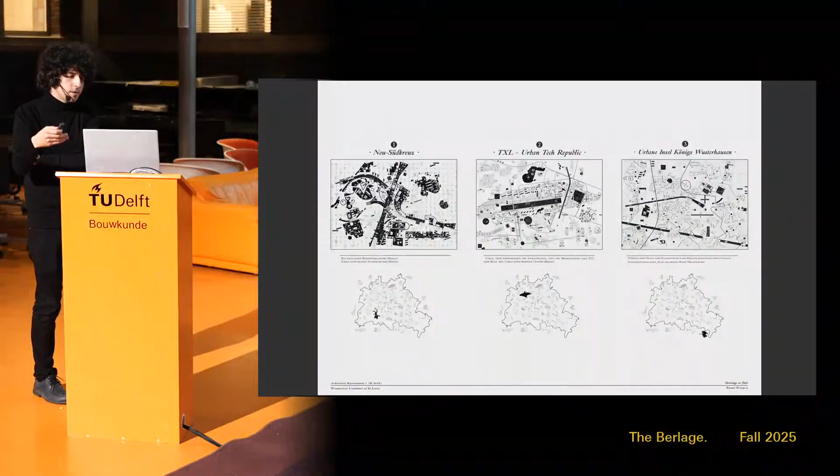I would like to share with you 3 of the different islands that we developed much further, because we took the chance to somehow challenge the notion of the typology, of the type, of the urban type in each of them. So for each of these islands, we were trying to juxtapose 2 new typological approaches, or 2 new types of urban spaces, that were the result of emerging phenomena that we were identifying at the time.

So the first island is Neu-Südkreuz, which is the second biggest station in Berlin. The other island was operating with Tegel Airport, that was going to be unused the following year, and now it's empty. And the third island was operating with the periphery, with a suburb called Königs Wusterhausen.

So somehow the first of them was operating with a notion of a site which was extremely congested. The second island was operating with a site which was empty within the city, and the third one was operating with the future of the city and how the city can grow to the suburbs. So in that sense, we were extremely radical in the approach to the competition.

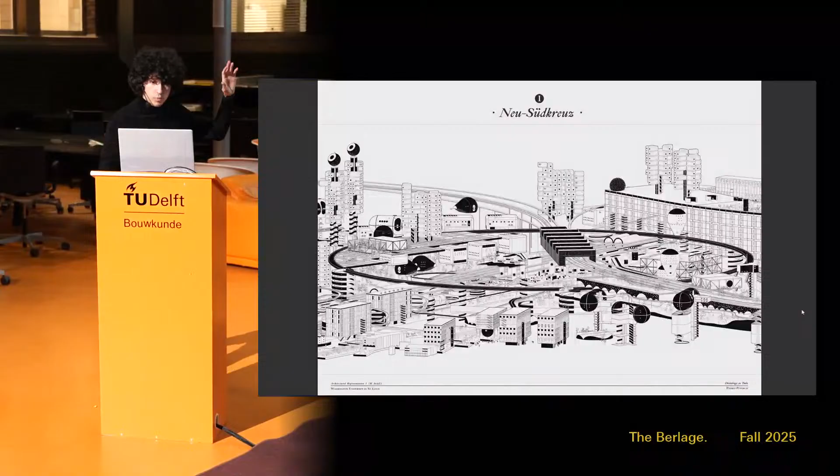We decided, instead of doing huge panels with a lot of information, as the teams that won the competition did—which were mostly urbanists—what we did was a very radical approach in which we also designed the panels from 3 main documents. The first of them was a huge axonometric, the second was a huge rendering, and the third was a huge plan.

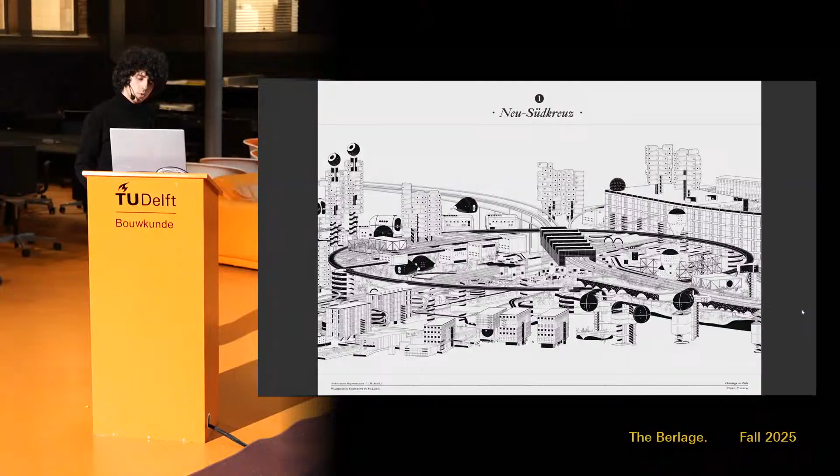So with these 3 documents: in the huge axo, we were referring to the architectural design of how the city was going to look in 2070. With the render, we were trying to emphasize the idea of how it was going to be materialized. And with the plan, we were trying to give the strategies and be precise on how it was going to be developed. So basically, in the 3 projects, we were operating with the same strategy of black and white architectural language, using this black hatching technique to show everything that belongs to the first type, which is commuting urbanisms.

So, all the kinds of urbanisms generated as a consequence of transit and transport infrastructures. The second of them is convergence culture, which refers to a series of vacuum islands in the city of Berlin that define the grid. In this plan, everything in black is positioned according to its geographical position, but all the other islands have their own coordinates, representing the vacuum empty spaces surrounding the station.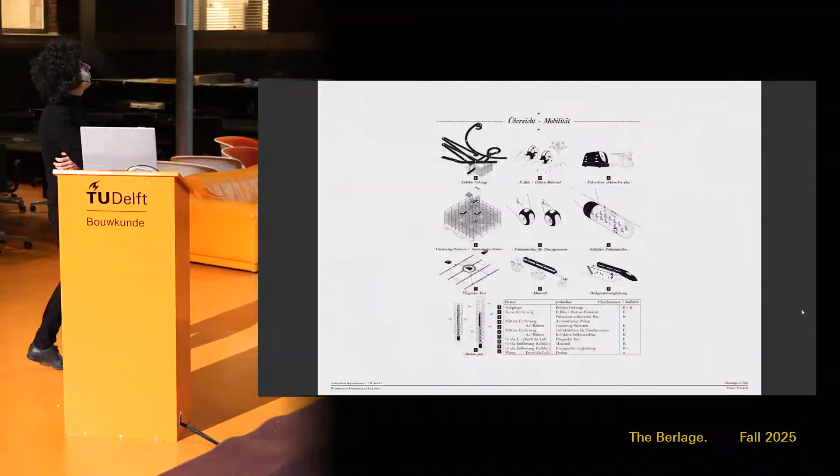In terms of commuting urbanisms, we weren't just trying to define the mobility systems and strategies that would operate in Berlin over the following 50 years. We were much more interested in the types of spaces and architectural devices that this infrastructure can generate and needs for its functioning—spaces and activities that happen on the go.

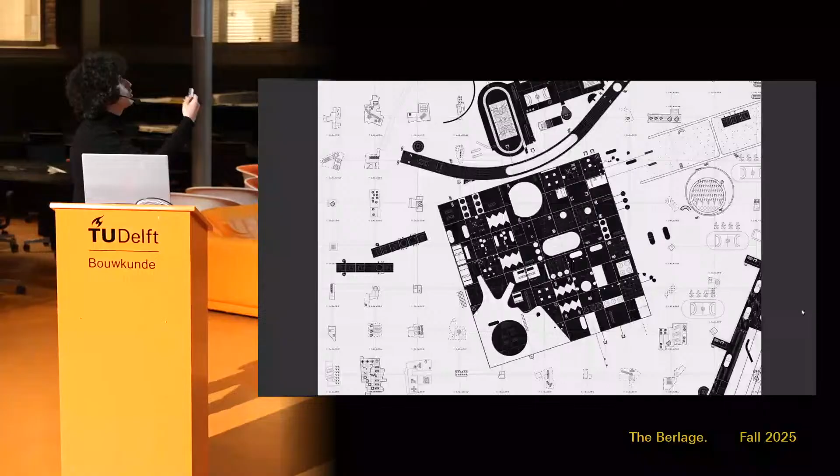We were doing the same type of approach for the vacuum spaces, classifying them into 4 categories: spaces that are just empty, spaces that are courtyards, spaces that are in between infrastructures, and spaces that are empty industrial spaces. If we zoom into the plan, we were relying on this abstract language to incorporate notions that aren't formalistic or architectural in approach, but come from cultural or, in this case, infrastructural approaches.

I'll go quickly through the other two projects, since I just wanted to emphasize the overall strategy. In the other two side projects we did the same. In Tegel Airport, we proposed an axonometric showcasing how the project and its different architectural elements were designed, with a huge rendering. What we were emphasizing was more on the materialization and how it was going to be lived.

In this case we are working with two phenomena. The first is Industry 4.0—industries and energy production strategies that are much cleaner and not noisy, and therefore can be incorporated back into the cities, not needing to be outside them. Everything here follows the same strategy: everything in black responds to Industry 4.0, and everything white responds to another phenomenon we call pop-up urbanisms, or the architectures of the event.

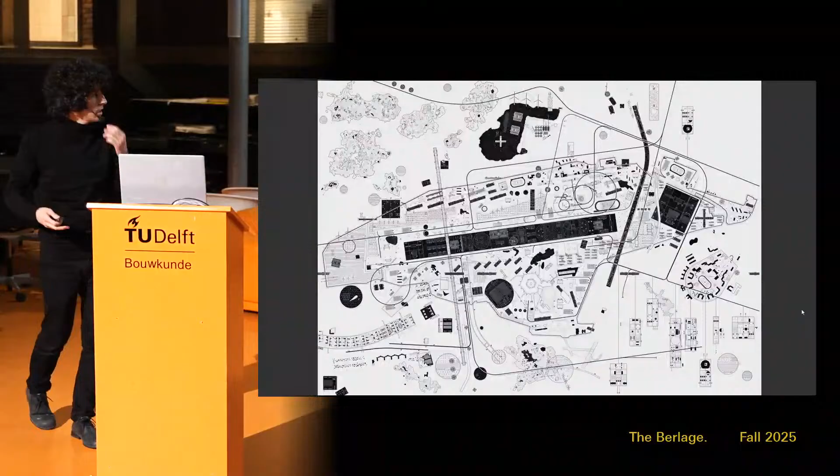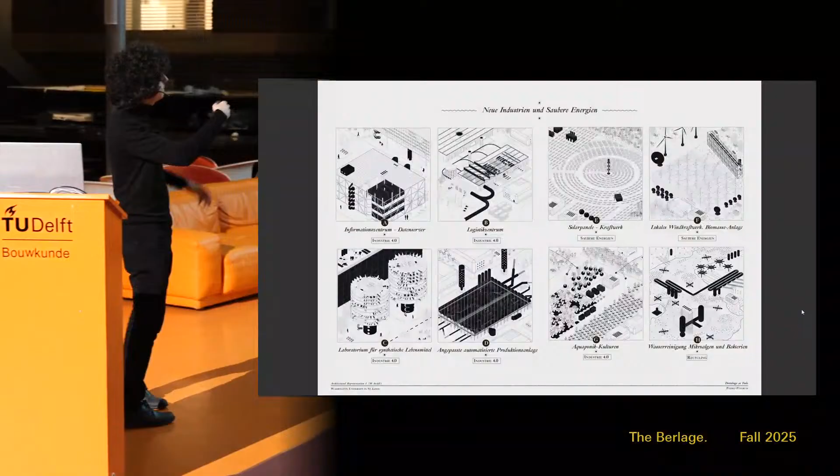This is precisely what we've been doing in the design masterclass for two weeks, which we'll present here tomorrow. It was extremely interesting for us to establish a juxtaposition and balance between the extremely formal and static approach of industry and the extremely informal, non-static, dynamic approach of nightlife and festival life. We were defining the same thing again—we weren't so much interested in the industry per se, but in the spatial scenarios and architectural scenographies that introducing this industry within the city can offer.

And the same with the pop-up urbanisms. This was extremely relevant in a city like Berlin, where weekend societies and nightlife are so important and so much part of the culture. It has proven that culture is not exclusively restricted to buildings such as the Berliner Philharmonie or the Jüdisches Museum, but has migrated to spaces such as Tempelhof or Berghain and other interesting spaces around the city.

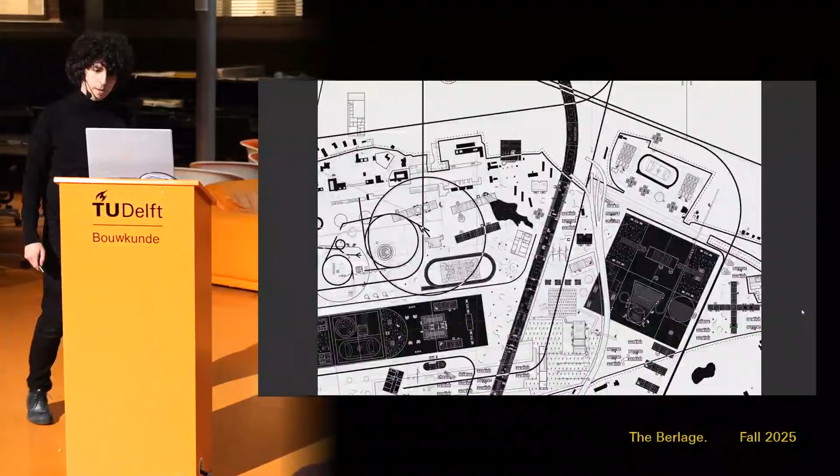Again, if we zoom into the plan, we can see this duality between the extremely formal approach to the metropolitanism of Industry 4.0 and the extremely informal metropolitanism of pop-up urbanisms. And finally, the last approach, the third sub-project, which was in the outskirts of the city, operating with the suburbs.

Here we were trying to develop a little further the strategy that I showed in the project in Russia, in Gorodskoy Dom, in which we were trying to see how those strategies of mixing residential life, or life and work, together can inform and offer a benefit for the suburbs.

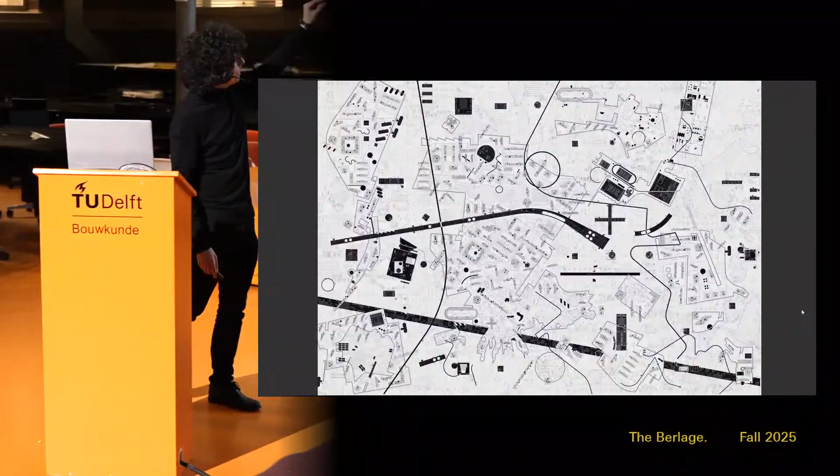Especially in cities such as Berlin, where the outskirts and the suburbs are extremely residential in a huge percentage of the areas, we wanted to incorporate some of the density and variety of the city center. We operated in a way that was multi-scalar, introducing within the urban and residential blocks some capsules that can coordinate, but also, on a much wider metropolitan and even territorial scale, big hubs of work and production.

So in that sense, we developed further some of the strategies applied in the project before, but in this case at a bigger scale, which needed to offer a series of subtypologies.

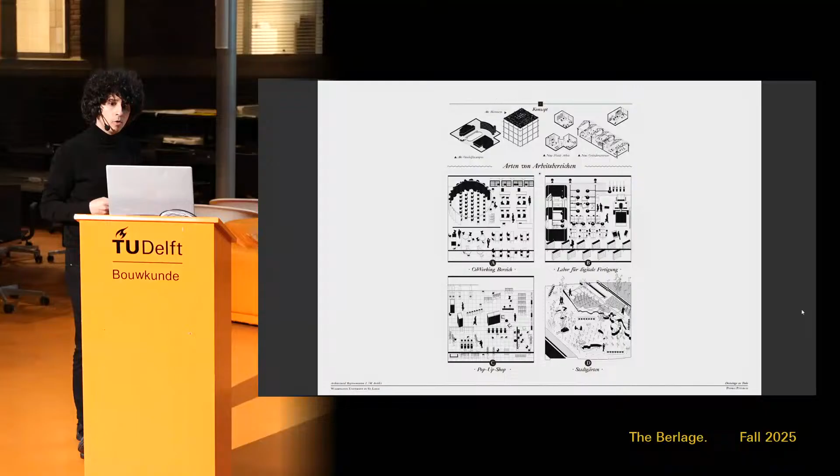We also started to identify new practices related to new types of work. Especially at this time, we were doing part of the project within the confinement of COVID, so it was important to see how, for example, remote working, which was not so established before, was becoming established and could offer a new urban paradigm.

So if we zoom in into the plan, we can see a little better that trans-scalarity, or multi-scalarity, between the tiny domesticated urbanisms injected into the residential block and the big hubs of production and work settled within the plan.

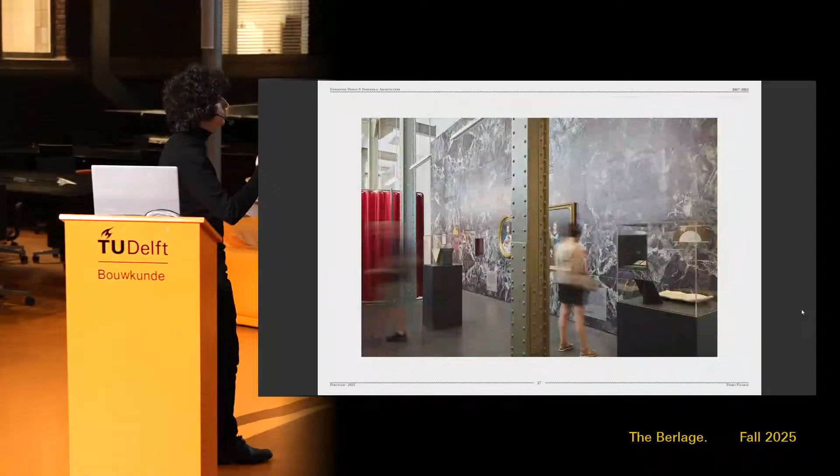So with this I am finishing, giving a final comment, going back again to the idea of this kind of abstract language that has somehow been helping us develop projects that deal much more with critical thinking and research, and which have also allowed us to start producing installations in museums, as well as a series of projects dealing with museography, or the restoration of a museum we are doing in Madrid.

And the strategies we've been developing in projects we haven't built, such as the Gorodskoy Dom in Moscow, have been informing other scales of architecture we are doing now with other types of pieces. That language is extremely important for us.

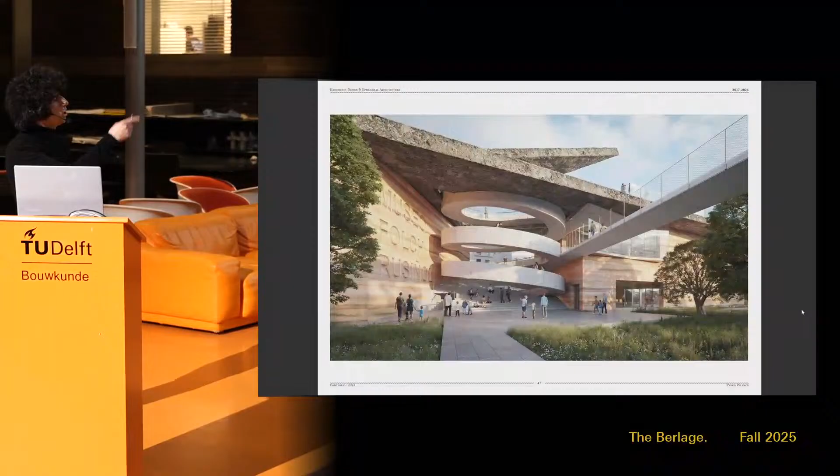That kind of technical approach is allowing us to inform the projects with notions of material, sociological, ecological, and economical approach, ranging from the scale of the building to the scale of the master plan, such as in this square we designed two years ago in the south of Madrid.

Or some of our most recent projects, in which we are continuously establishing a critique of the type. In this case it's the type of the multipurpose hall, one of our most recent projects from this past year in Mexico.

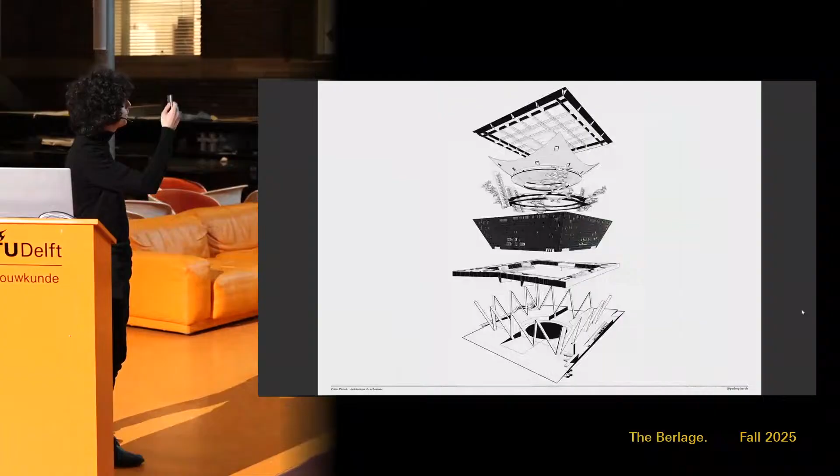This was a multi-purpose hall that needed to host a series of musical events, but through its structure and layout configuration, we were also offering the possibility of transforming it into an interior square or interior public plaza, so that the building could be circulated throughout its interior. And with this I end.

Thanks very much. I hope that it was not too boring.

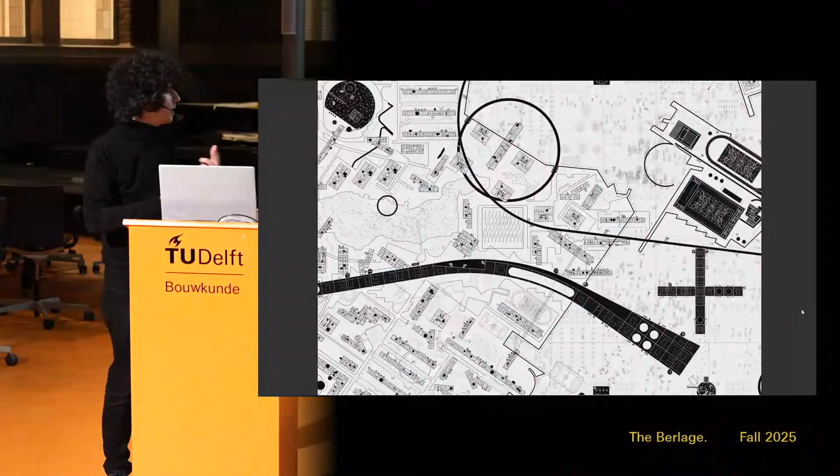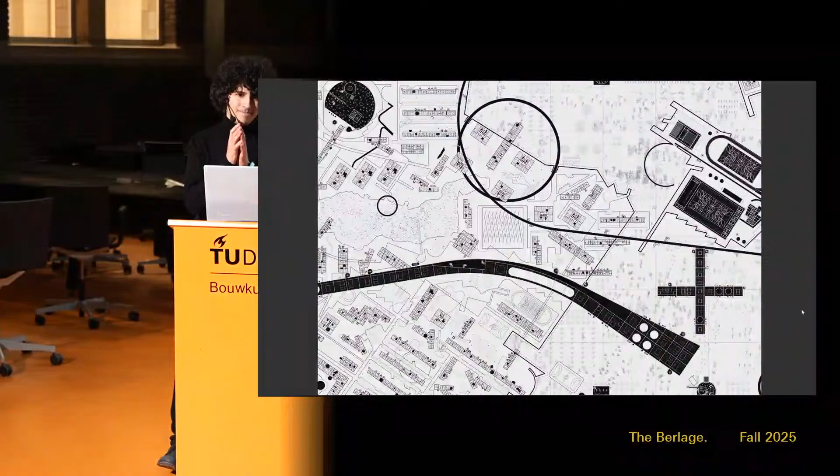Obviously, a more intellectual and informed audience could go much farther in detail. So what we've also been trying strongly to work with is that regardless of the complexity of the abstract language, there's a certain very basic possibility to read it through diagrammatic information. I don't know if I'm answering the question, but to sum up the answer: it's against us, but we also deliberately favor it and want to use it because it's useful for us as a practice, as a kind of stubborn attitude.

Thank you. Questions?

I haven't completely made up my question, but going to that complexity of abstract thought and design, which very much carries into your graphics—the process behind designing all of this makes your work look very visual. While it's more comprehensible at smaller scales, like the fair or your theater, how does the detail and degree of design complexity carry throughout these scales, especially in your urban projects, which have recurring motifs from your smaller scale projects? How does that carry over? Is there a process which limits or expands it?

Yeah, it's a very interesting question. I'd try to give two answers. From a more conceptual point of view, we don't care so much about scale in design, and that was part of the emphasis of the lecture—to show that we work with the same type of intensity on small projects as on big projects, because for us it's just a matter of intensity.